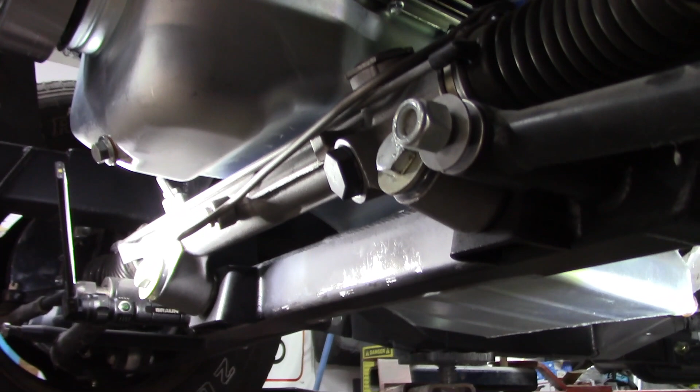So I'll go over a few things that are an issue, or could be an issue, depending on how I approach getting the bolts in. There's very little space here between the bottom of the oil pan and the rack and pinion setup.

One thing you could do is remove the rack and pinion setup to get it out of the way, but I'm going to try to avoid that because, down the road, if somebody needs to take this apart, they don't want to pull that rack and pinion out of there unless they have to.

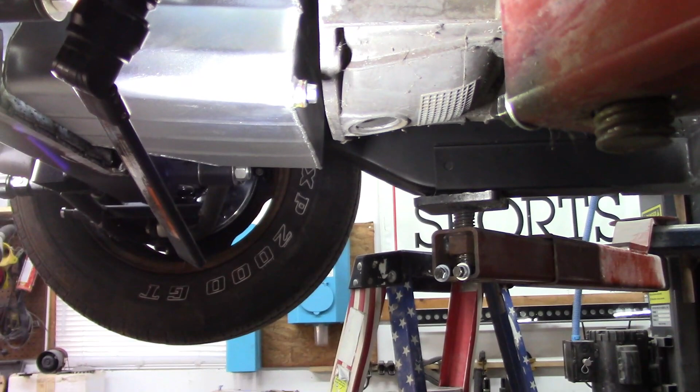In the back, where the oil pan is going to meet or come close to the cross member, there's 3/8 of an inch or so of clearance, which is fine. But if you lower the back of the engine very much to try to make room, that oil pan can interact with the cross member, so I want to try to avoid that.

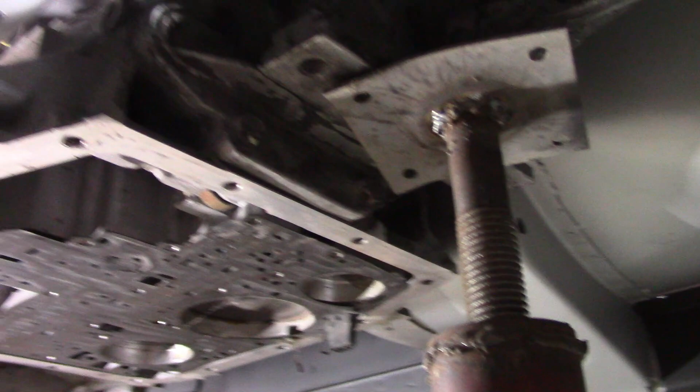In the back here, I talked about in the last video how I made a bigger hole in that tranny brace, or the cross member brace that runs side to side, for the air vent cap that's up on top. So whenever you're thinking about putting this in, you have to consider how that's going to interact, because some ideas were to tilt everything down and work it up in, and I think that would be a conflict.

Now, of course, in the back here, I can take off all this bracing that's part of the TCI kit, that's not really a big deal. On the other side of things, that engine has to come straight down. I know it was suggested to try to put the thing together and bring it in and angle it, but with that oil pan and stuff being in the way, it's just not going to work.

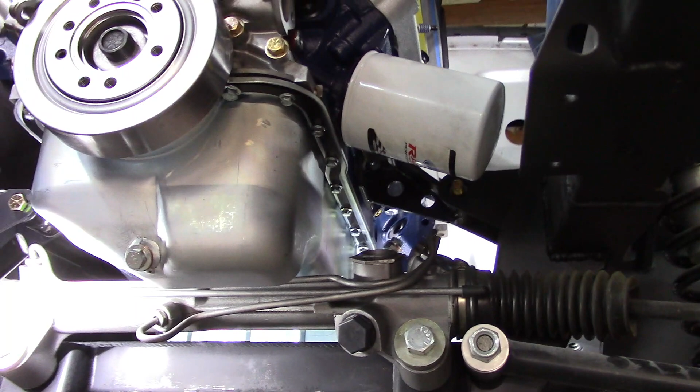Another suggestion was to remove the engine mounts and just lower everything down into place without the mounts in place, then lift it up and reattach the mounts, which could work, but again you're limited by this travel area. I'm trying to think of ways to make it as convenient as possible for the end user when it comes to maintenance and that sort of thing.

The other things suggested were, of course, cutting the firewall. I have some more information that I think is going to be beneficial. I'm going to show you from up above when I get up on top of the ladder. Here are some measurements that may help with all this.

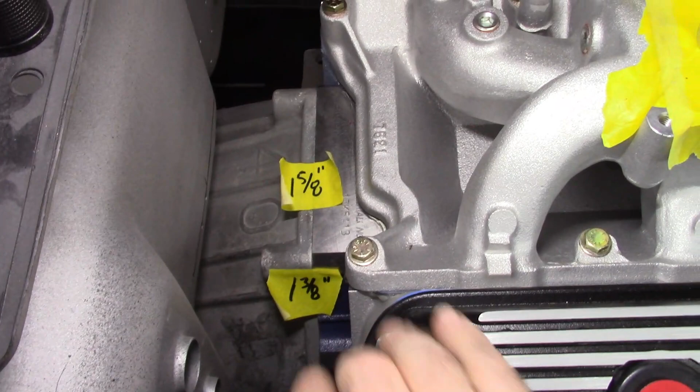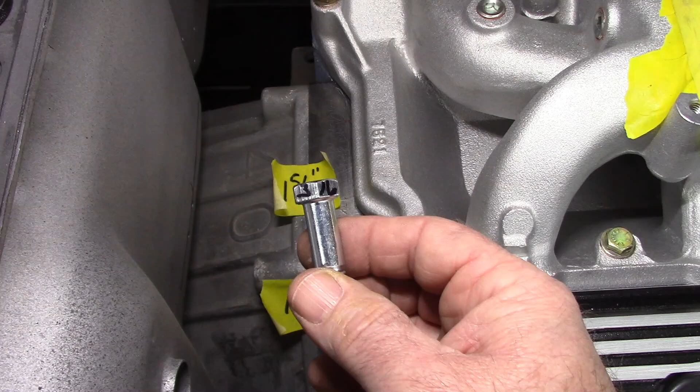1 5/8 is the measurement from the front of the firewall to the mount lug on the transmission. 1 3/8 is the drop from this location on the transmission to the mating flange, or the back of the block. The bolts they provided with this kit are 2 3/16 inches long, and if I try to put one of those in, I can't—there's just not enough angle. I hit the bottom of the firewall in that transition area, so that won't work.

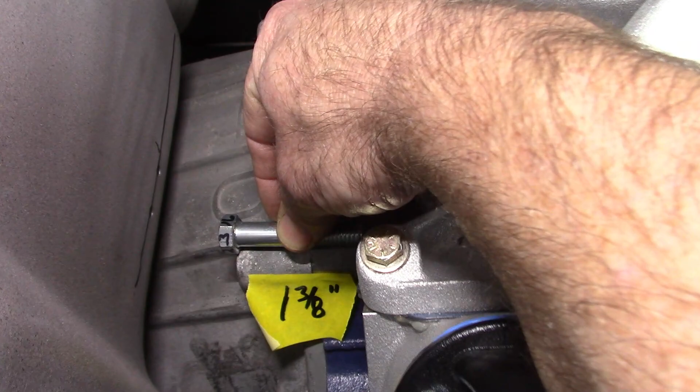If I take a 1 3/8 inch bolt and feed that in, it'll go in, and you see you have about 1/8 of an inch maybe sticking out. If I compare that to this 2 3/16 bolt, you can see—hopefully see, let me get the light, here we go—how deep that is in the block. That's a lot of material into the block.

I've looked up some requirements for grip length, and this is probably close to the max length you would need on this. I'm going to show you some more information on that, and try some different things to see if I can make something work without modifying anything but the bolts.

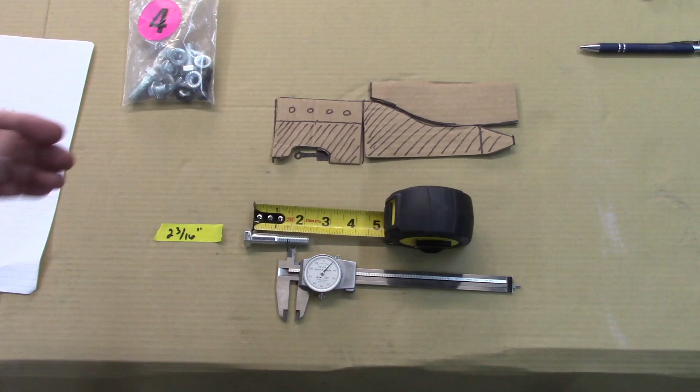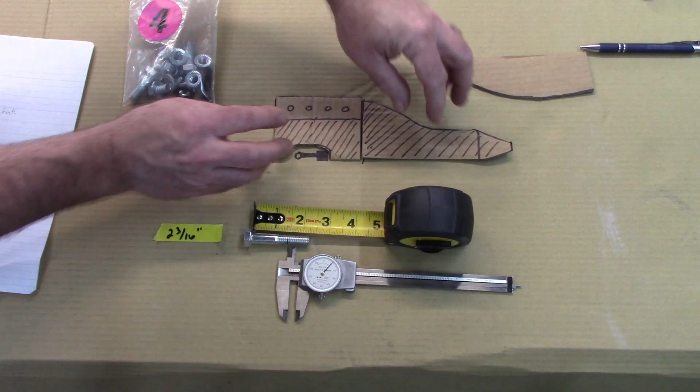Don't mind my crude representation of the engine and transmission. Basically what I wanted to show was, with the engine, it has to come straight down to fit over the cross member, and if you try to tilt it, it's going to hit things on the way in. The transmission comes in second, and the point is, if you have a couple bolts here and try to tilt the assembly, it'll try to bind on various things as it gets moved around. Now, the one suggestion was to remove the engine mounts, which in theory could let you bring the engine down a little bit and give you enough clearance.

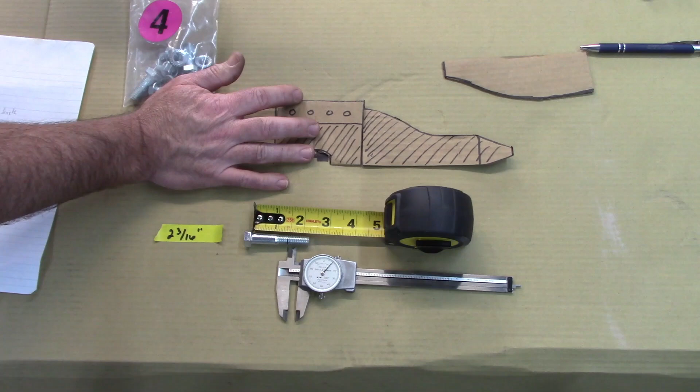But down the road, if somebody wants to take this apart again, they're going to have to do the same thing, and that gets kind of cumbersome. The floor pan fits really, really close to the transmission.

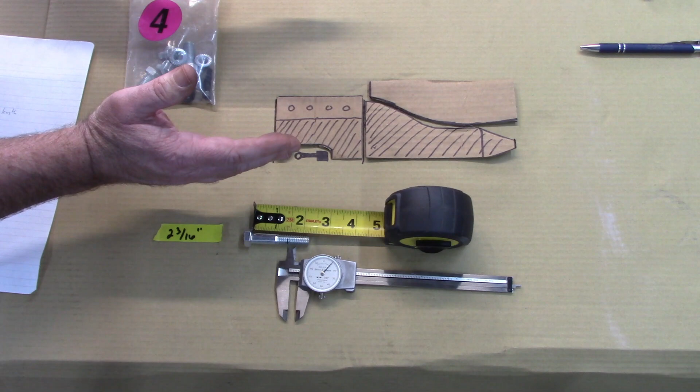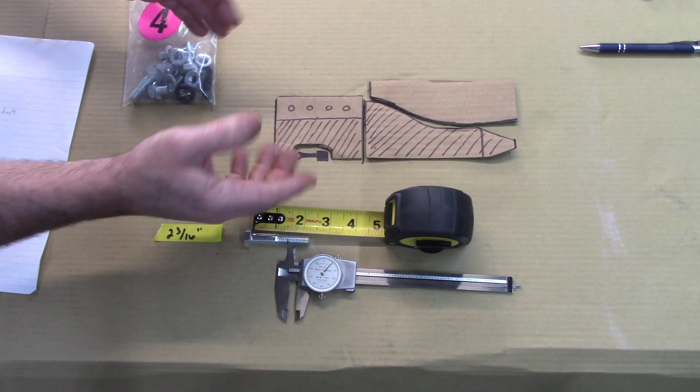So I've tried to lift this up, and I'm limited by where that cross member hits in the back, so that kind of limits the angles. I've also tried to lower it as an assembly, and again, the bolts that hold the motor mounts can only pivot so far. It was suggested I pull the bolts halfway out, but the flanges are so tight on the motor mounts or engine mounts that they would still bind. It would still cause a problem.

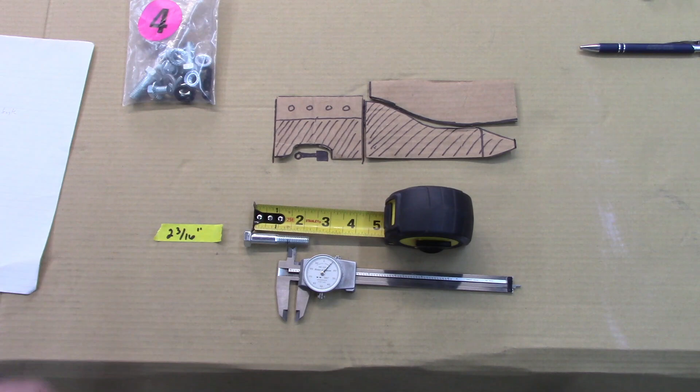One of the ideas, of course, was to cut the firewall and make a relief, and that's kind of an option as well. But I'm going to experiment a little bit differently.

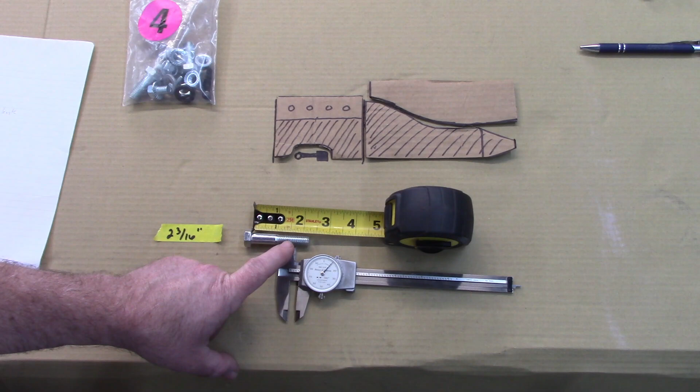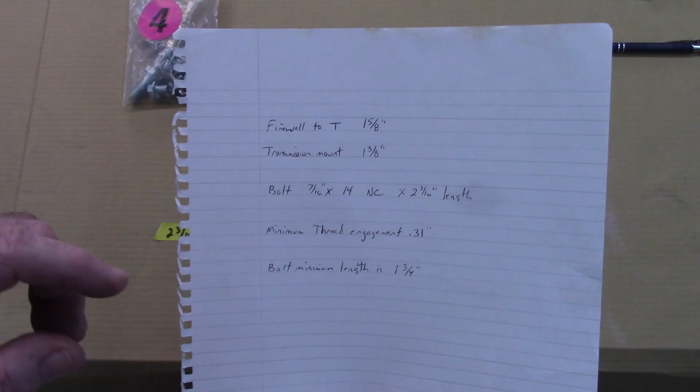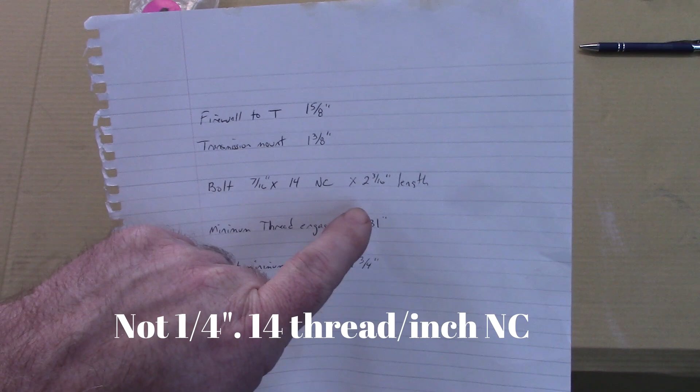These are the bolts that came with the kit, and as I point out, they're 2 3/16 inches long. Doing the math, if I've got 1 5/8, I need 1 3/8 of length to cover the thickness of the transmission mount. This might explain it better: from the firewall to the transmission it's 1 5/8, the transmission mount is 1 3/8 thick. The bolts they give me are 7/16 by 14 national coarse by 2 3/16 grip length.

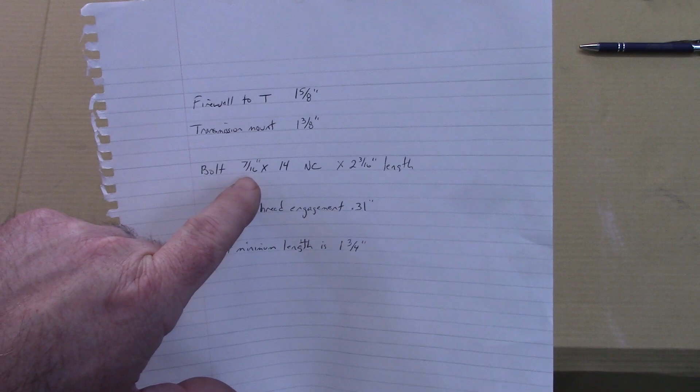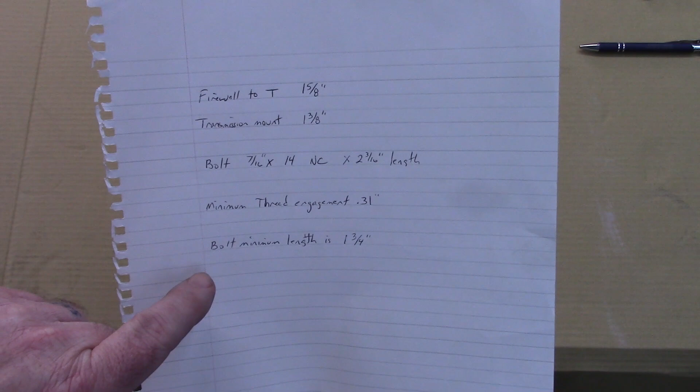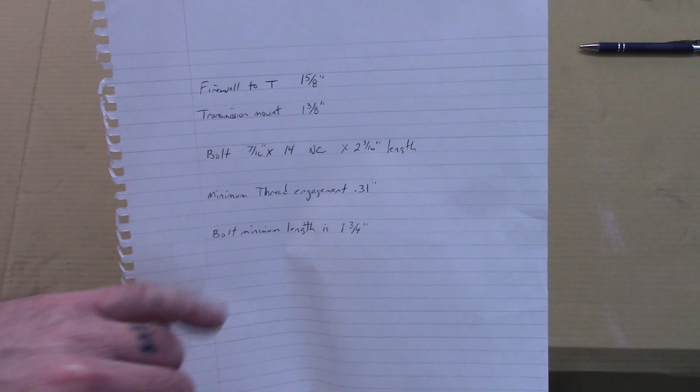There's another reference in there that says a rule of thumb is it's supposed to be 2 times the diameter. So that would make that 7/8 of an inch in length - that's an awful lot of material.

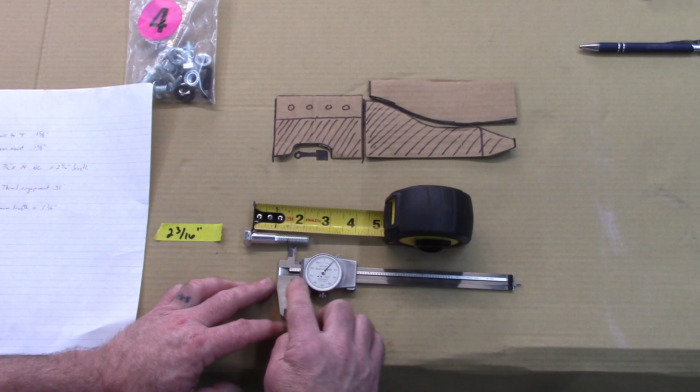Now what I see is, in this case, I've drawn this out. So what I've done is I've put a mark on the bolt at 1 3/8. And then if I add in 0.31 for the additional length, then what should be a reasonable overall length is 1 3/4 minimum.

So what I want to do is start with this bolt that's 2 3/16 and shorten it up. I'm going to come back to maybe 1 7/8 or 1 3/4, which should be well over that minimum length required for the bolt to have proper grip. I think I may be able to get away with doing this and getting these bolts to work. And if they don't, well, then I'll go to plan B. But that's where I'm at right now - I'm going to shorten up one of these bolts and see if I can get them in the holes.

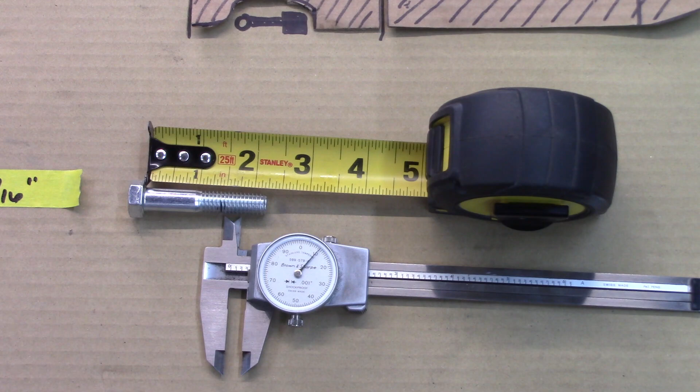So I cut the bolts. I started with this one - I just went short, this is 1 11/16, which is less than the minimum I want of 1 3/4, but I wanted to see if it would fit, and it does. So I cut one at 1 7/8 to see if I could get that in - no, this will not fit. And then I cut this one at 1 13/16, which is just over the 1 3/4 that I want for a length.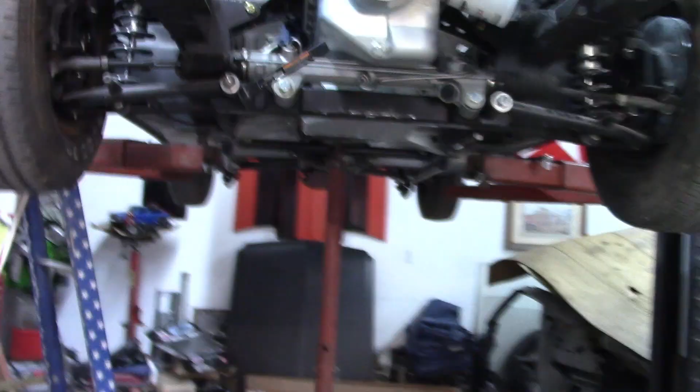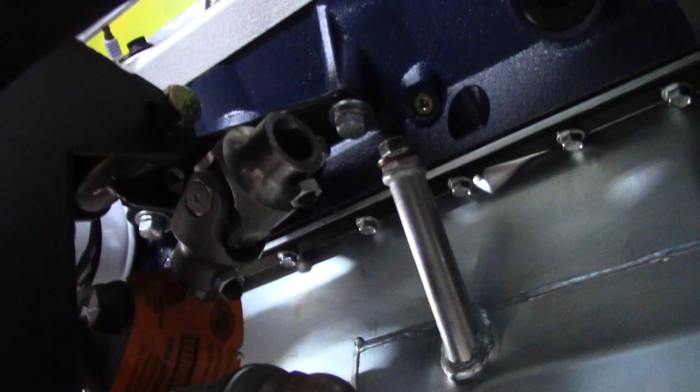Now what I did is I lowered the transmission on my little stand here. In fact, the stand's not even touching, so all of the weight is on the engine mounts, on the bolts. Everything is on the mounts and it's as low as I can get it.

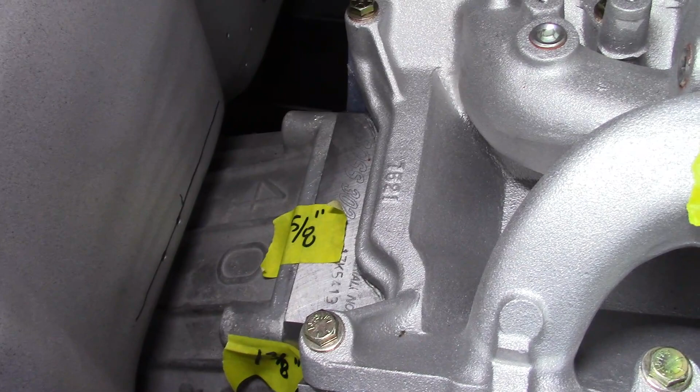So let me get up on the ladder and show you this bolt. Hopefully you can see all this okay. It's kind of tough being on the ladder, but anyway, with the engine tilted down in the back, if I go to the far side, I can get that in - just barely. But you can see how much thread I have to work with. That's making contact with the back of the block, so that's a good bit right there - it's probably close to at least 1/2 inch.

And now I can get this bolt in on the passenger side, but I have to push down a little bit on the back of the block. Obviously I can't do that with two hands or one hand holding the camera. But if I push it down just a little bit, I can get that bolt in, and I think that's going to work out fine. If I put the bolt up on top - again, trying to look at what I'll end up with for a grip length.

There's contact with the back of the transmission, and I've got about 6 threads that will be biting into the block. Now I do realize there's a 1/8 inch plate that's going to go in there, and I don't plan on using a washer. This kit they sent me had no washers provided for the 6 bolts that go into the back of the block, so I'm not going to use one.

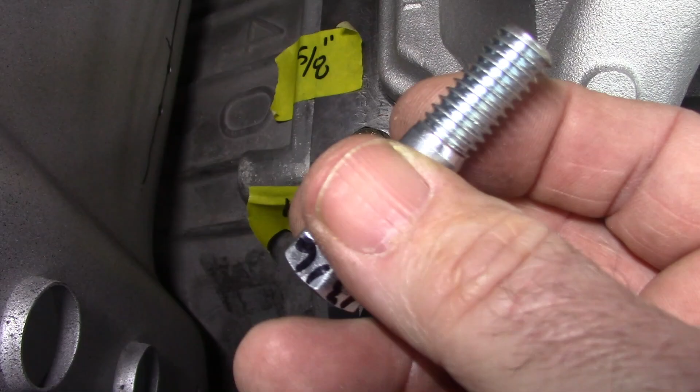Now I may have to trim this down to actually 1 3/4 inches, because when I add that 1/8 inch plate, it's going to push the transmission back just a little bit, but I still feel like this is going to do the job. So I think that takes care of this problem.

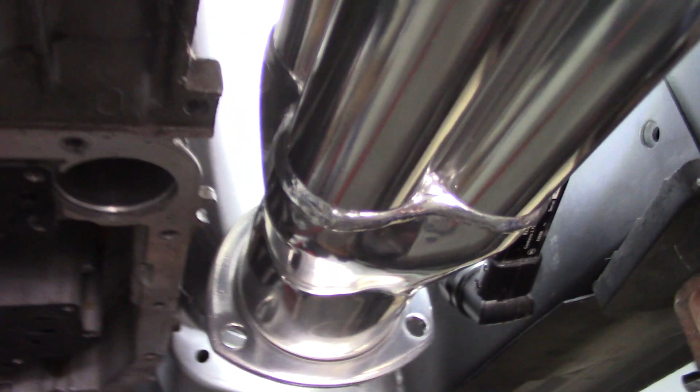So now I'm on to resolving the header problem. What I've done is bolted the header in place, so it's on the car as it should be, and you can see clearly it has clearance right here at the transmission. Of course the light's in the way there, but everything else is cleared. Suspension, all that stuff is fine.

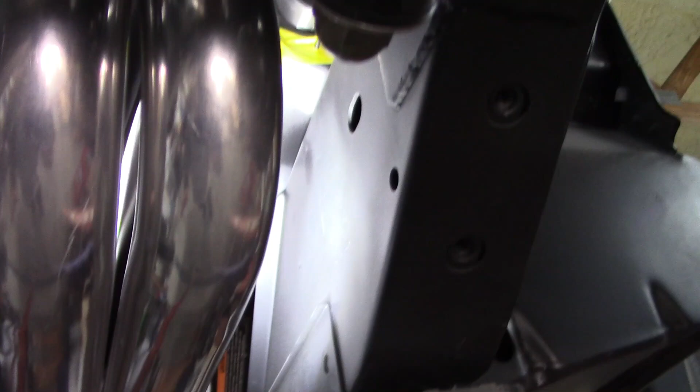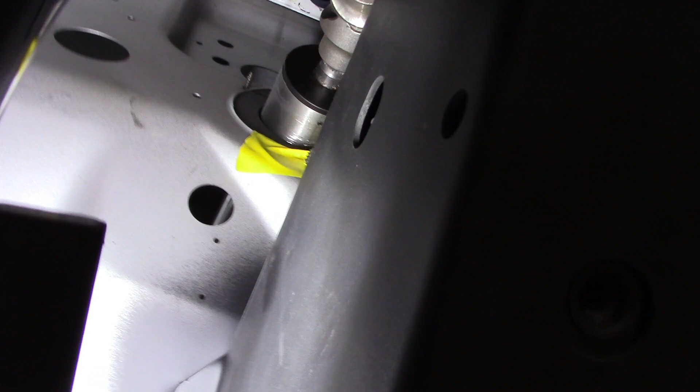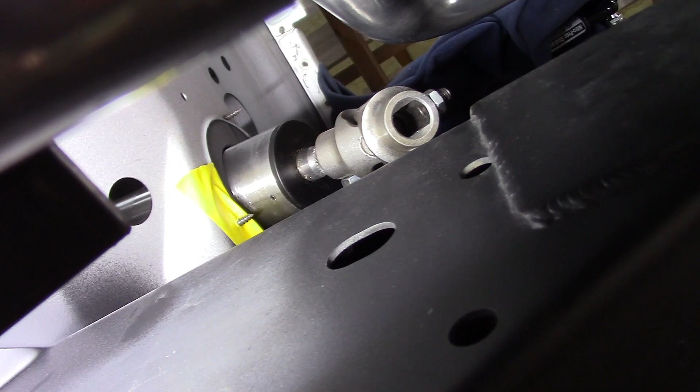Now, in a previous video I talked about how the angle from the U-joint up there to the rack and pinion setup would interfere with, or the shaft would interfere with the header. What I found is, after a suggestion from one of the viewers, that I could extend or push in that steering column as I mentioned earlier, and I've done that. I've taken it into the engine bay as much as I possibly can, and I'll show you more of that in a second. There was only about 1/4 inch of the original shaft sticking through the firewall.

And as you can see now, I've got about 1 and 1/4 inches sticking through, and that's going to change the angle on the U-joint. Now I still am going to have interference problems, and I'm going to show you that in a minute, but this is going to help.

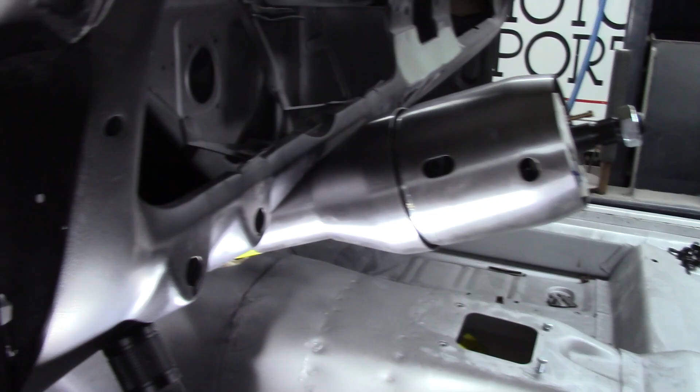Let me show you the top side of the steering column. When I first put the steering column in, I had brought the flange up to about this location, and to figure that out I had taken measurements from the other car, or what was left of the car that still has the steering column in it. I don't remember the exact measurements, but I set this at about the same distance into the seating area. So when I did that, there was good clearance at the steering column where it meets the bottom of the dash.

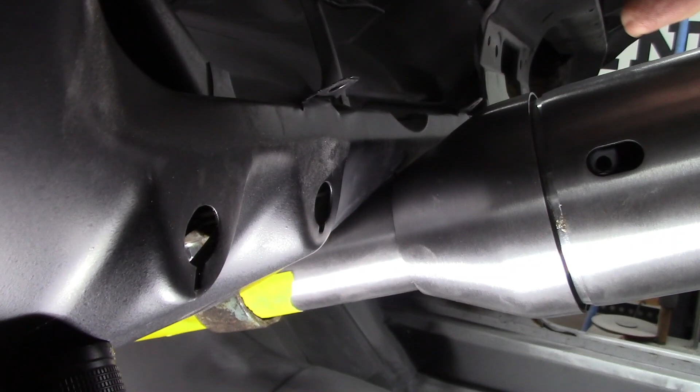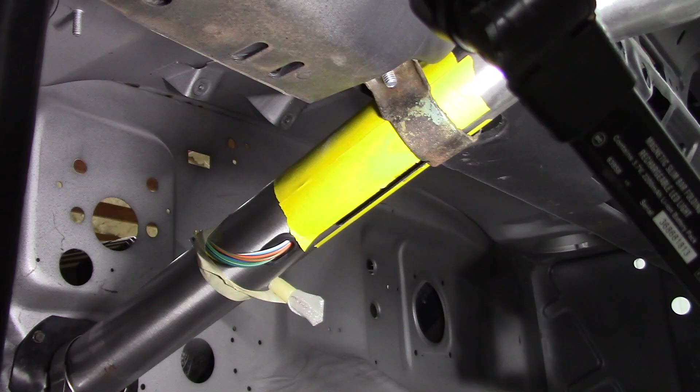As you can see right now, it's not touching with this big collar, the tapered collar, but it's very close. The other thing I had to do was the bracket that actually holds the column up to the bottom of the dash. It has a slot in the column, and there's a little tang or tab sticking out of that, and this is at the lowest possible setting I could still bolt that in there. So just know you can only go so far, and clearance at the dash is going to be one issue, and if you use the original bracket, that'll be the other issue. Otherwise, I think it'll be fine.

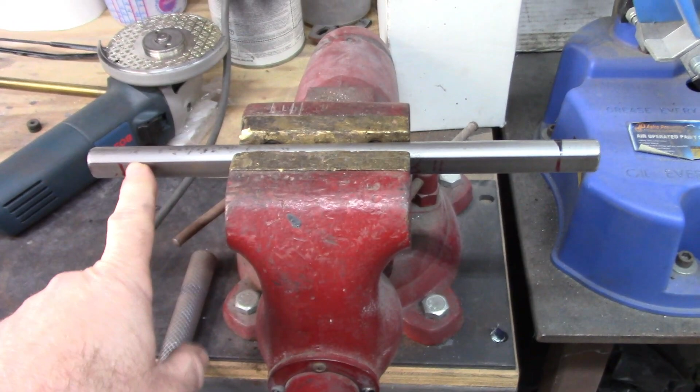Now this is the shaft that goes from the U-joint coming out of the column to the U-joint on the Borgeson rack and pinion setup. Initially when I made this, I had made it as long as possible, and these red marks indicate where it sits within the U-joint to have clearance on the inside so it doesn't hit anything, but also give enough length for it to be deep enough in there. So those were the old marks, showing how much was revealed when the U-joint was in place.

What I found is, since I moved the column down, I'm going to have to shorten it by basically that same amount. There's my mark of how much material I've taken away, or I'm going to have to take away, in order to get this back into the U-joints.

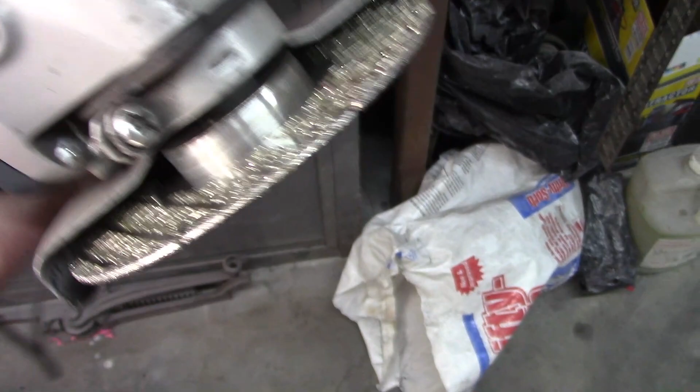So I'm going to cut that off, and if I haven't said it before, I'm using this Bad Dog diamond wheel. Really liking this thing. They're not cheap, I'll tell you that, but they've got a lifetime guarantee, and I've cut many things with this so far, and I'm very happy with it.

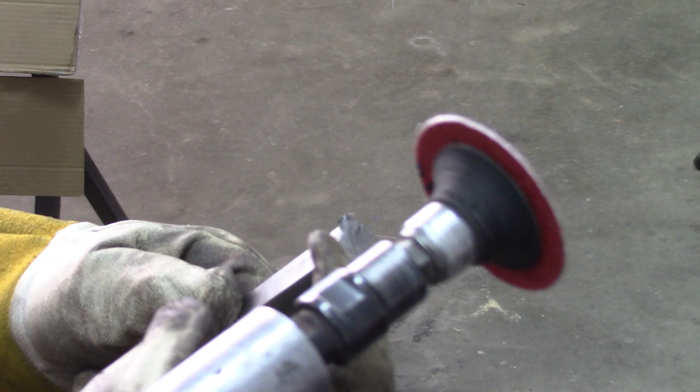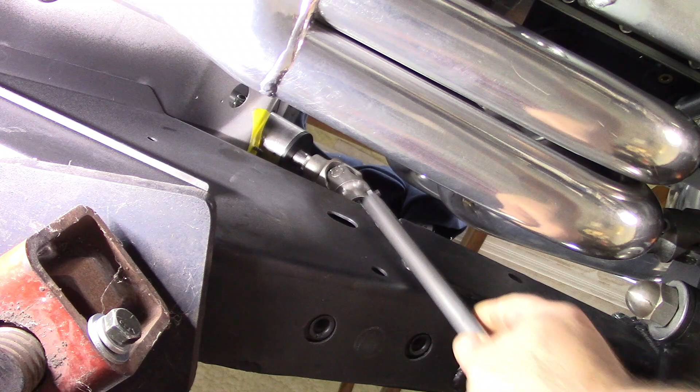I know this is really hard to see, even for me, but if I put the end of the shaft into the upper U-joint, I can get it towards the lower U-joint. Let me try to get a better angle so you can see it. If I line up the steering shaft to where this lower U-joint almost goes in, you can probably see it's hitting the header.

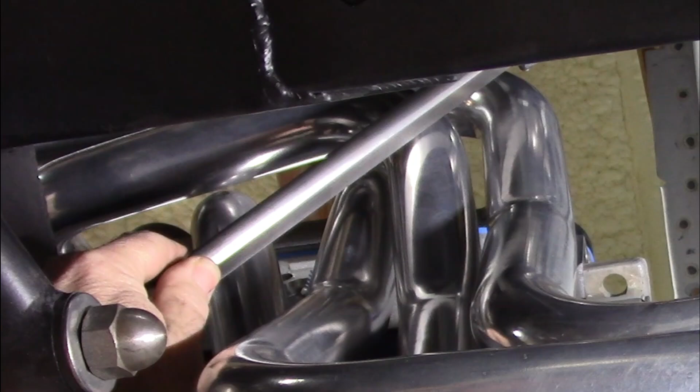Now, I know I said before I wasn't going to put a dent in these headers, but I think I'm obligated to put a dent in these headers. It's not going to take much, and I don't know what the alternative would be besides putting in shorty headers, as Call of George has suggested. But if that's what it takes, that's what it takes.

I'll attempt to get a better angle there, maybe that helps you see it. It's not hitting much, and I'm just going to have to make a dent. I'll be very careful with that—hopefully I don't damage the coating. If it does, well, we'll go back to square one. But at this point, I don't know what else to do.

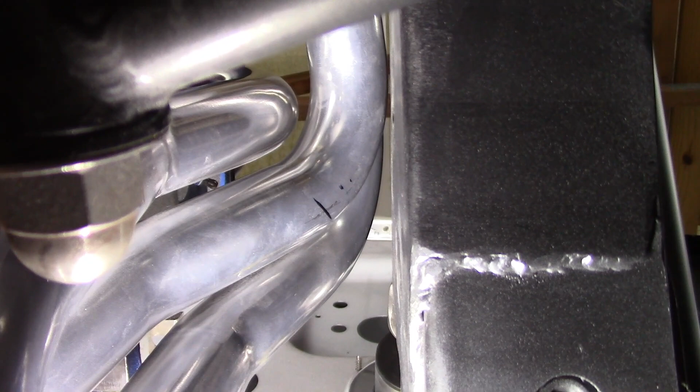So I placed a mark. I traced the edge of that bar—that's the lower mark, so the thickness of the bar has a little tiny mark above that. I couldn't get a Sharpie in there to draw a line, so at this point that's my high and low area, and I'll find a way to make a nice dent in this header.

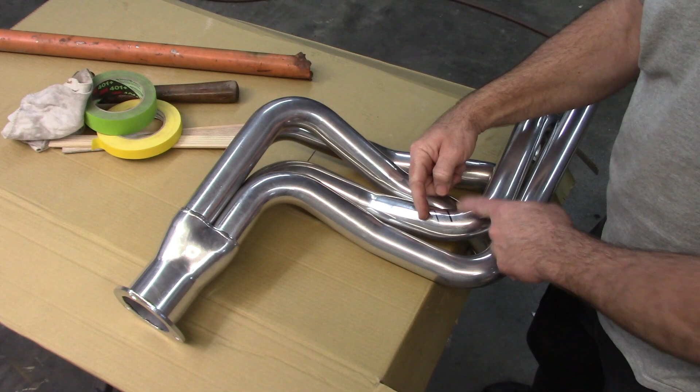So here's what I've decided to do. I've got the two marks right here on the pipe that needs to be bent. So what I did is I had the first mark and a little bit of a witness, and then I just drew two more lines, so I want to make sure I'm going to hit it in the right place.

So the first thing I want to do is get some tape, and I'm going to lay this across that location to represent my strike area, let's say. So if I line that up, that's going to be where I want to lay whatever I'm going to use to hit it, right? Now, at this point, I also want to reinforce or support the bottom of this pipe.

So I can take, in this case, about 3 paint sticks and get them underneath the bent part of the pipe, and that lets me know it's got some support. Now what I want to do is take a cloth and lay it right over the strike area. So the idea is, if I take this piece of pipe and lay it exactly over and follow the tape line—pow—I can drive it down and hopefully create a clean dent.

So I'm going to put some earmuffs on—I know it won't be that loud, but I'll do it anyway. Lay that in line. It's going to take more than that; I didn't want to drive into it. Just try it. Wow, that's some tough stuff. It didn't do anything.

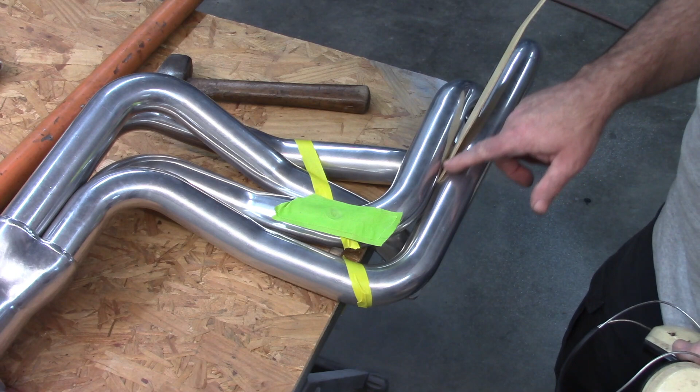I'm going to do a test fit and see if that didn't help. That's the only way you want to do this—go back and forth, check it, you know how it is. So I did a test fit, and it really didn't do much. I did add a popsicle, or a paint stick, between these two tubes, and I switched out to a piece of OSB instead of cardboard to give a little more resistance. So I'm going to try this some more.

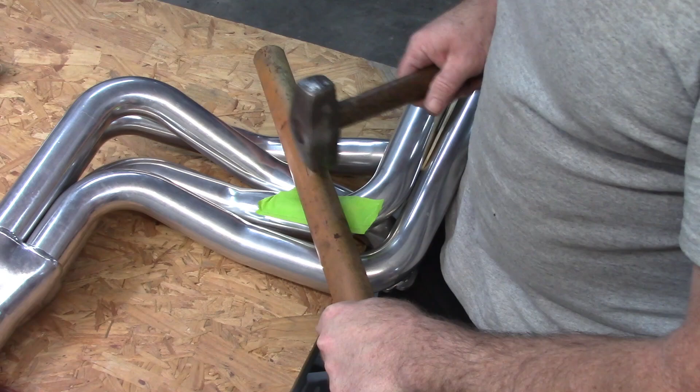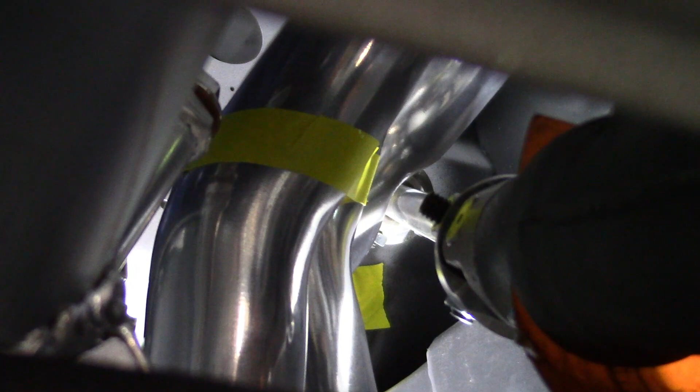You get the idea, I'll let you know how it looks when I'm done. I have the rod in, and if I come up from underneath, you can see looking straight up the side of the shaft, there's the dent in the header.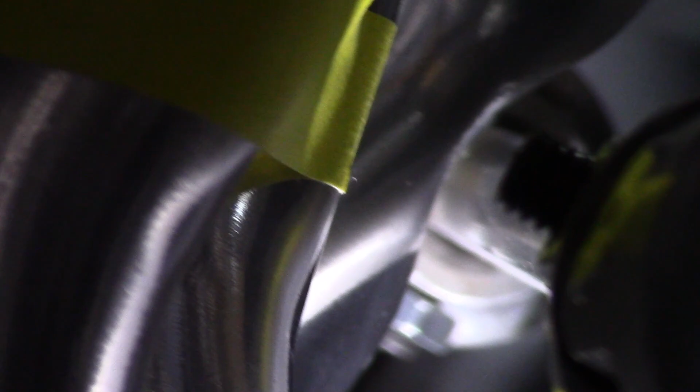Now that dent is not big enough yet. I say that because I can rotate the column or the steering back and forth, and it gives me just not even 1/8 of an inch of clearance. Get this angle here - it's still just a little too close. It's not touching, but it's going to need more clearance. So I have to get the upper half of the tube caved in more, and that may take care of it.

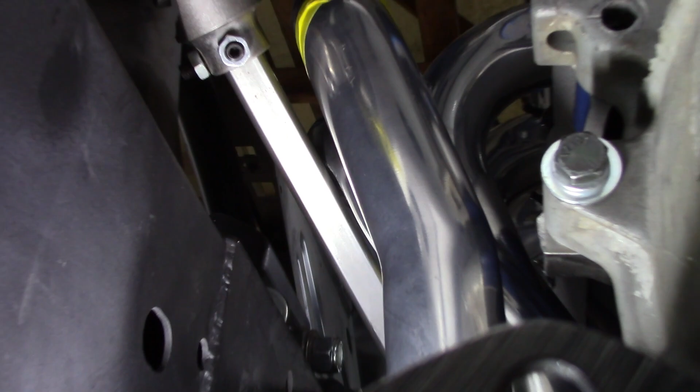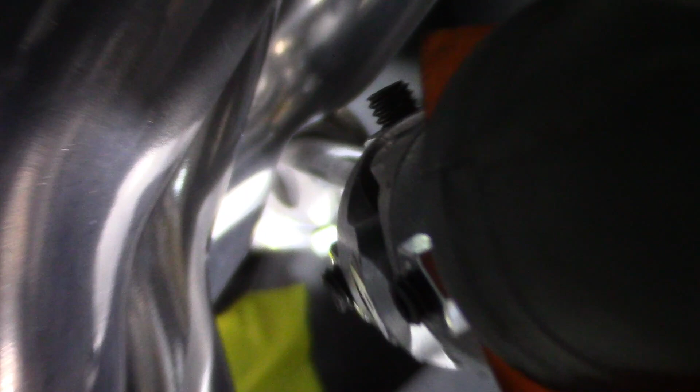All right, I got it. And I am now happy with that. You can see the clearance - I think that's going to be fine. There's about 1/4 inch of clearance around the shaft.

Come back on this side, let me see if I can get around that without the light in the way. Here's a better angle with the light out of the way. That, like I said, is about 1/4 inch. I think that's going to clear just fine now.

Obviously not something you want to have to do, but sometimes you just have to bite the bullet and take care of things. So at this point, I'm not going to worry about the headers fitting anymore, and I can move on from there. Now let me show you, I'll take this back off and just show you what I used overall to make that dent.

Sorry about the chainsaw noises, they're cutting trees across the street.

Using that pipe, it was starting to work, but it wasn't doing enough. And I also realized that this little table I'm on, this welding table, one of the portable ones, was absorbing some of the impact.

So I moved over to my rigid steel table, very thick 1/2 inch plate on top and steel legs - there's no giving on that. But I did the same thing - I used the pipe, got some movement, then moved up to a 30 millimeter impact socket. I was smashing on that socket to get it to change shape, but it only did so much. It would not get it deeper.

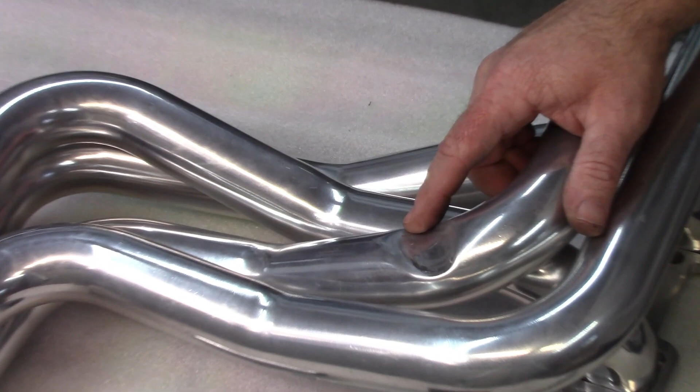So then I switched to a 3/4 inch socket on an extension and just wailed on it. I beat on this thing off and on for an hour to get the shape where I wanted it. I don't know that I could really go much deeper. If you look at it, it's not like a sharp corner, but it's compressed enough that it doesn't want to give anymore.

The nice part about this is you won't see this - this is looking down on the car. You can't see any of this. And then the shaft, of course, will cover up the rest of it. I don't see it being an issue.

Initially, I said I don't want to do this, and I really didn't want to have to do this. But what are the alternatives? Adding that other U-joint, complicating the system. If I could get away with it with this, fine. So that's what I did, and as it turns out, it worked.

Whew! All right, so that's going to be the end of this video. I don't want to do any more with the engine and transmission and headers and steering. I'm done with that for now.

I will say that I still need the cross member for the transmission. They make a custom one - I think they sell it through Summit, CJ Pony Parts sells it, and California Custom Pony Cars or something is one who has a kit for all this stuff, but I haven't really researched that. I do know the cross member is custom made, so I'll have to wait for that to come so I can make sure everything is going to fit.

But I'm much happier now than I was last week with the last video. As you could tell by the end of that video, I was very frustrated, and I don't like to get that way. I like to resolve problems, take a step back and figure things out. And that's basically what I did with comments from viewers like you.